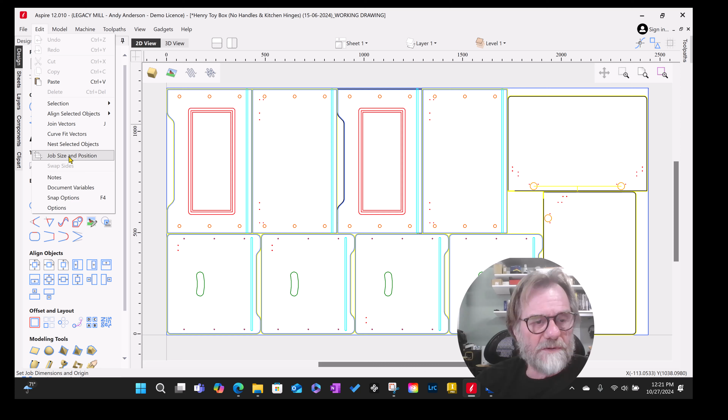So the first step in running an unknown piece of code is to go to the job setup screen. Now I'm going to cancel this for a minute, and you probably know where to find this, but I'm going to go to the edit drop down, and I'm going to come down to job size and position. And that's going to tell me how Wayne set it up for his machine. So we'll just start in the upper left-hand corner. It's a single-sided part. Double-sided and rotary parts we'll probably handle in a different project. I'm using double-sided in some door projects that I'm making right now.

Now we can see that Wayne works in metric, in millimeters, and that's the way his material comes, the thickness, that's the way basically he thinks and works. But Aspire is so brilliant that all I have to do is select inches and everything is instantly converted for me. Now my material is also slightly different. So I have a 97-inch long piece of MDF and a 49-inch wide piece of MDF and a 3/4 inch thick piece of MDF.

Now the other thing that's different is I've set up my system so that I run 0 on the machine bed. Lots of people set up on the top. It's an easy, fast way to set up. But when you run lots of sheet goods and you run the same kind of sheet goods, most of the time, setting up off the bed allows you to eliminate the touch off the material step. So that's what I do whenever I can. In this case, 0 is the bed of the machine.

And that means that if the bit came down and touched the surface, it would be at 0.75. If it was set up on the material surface, when it touched the surface, it would be at 0. If I drilled in 1/4 of an inch, on the machine bed, it would go from 0.750 to 0.5. The opposite would be true if it was a material surface. It would go from 0 to minus 0.25. Okay, that being said, the obvious thing is if I don't change this, then the program is written from the surface, but I'm running on the bed, it will try and drill clear through the material to start its cut.

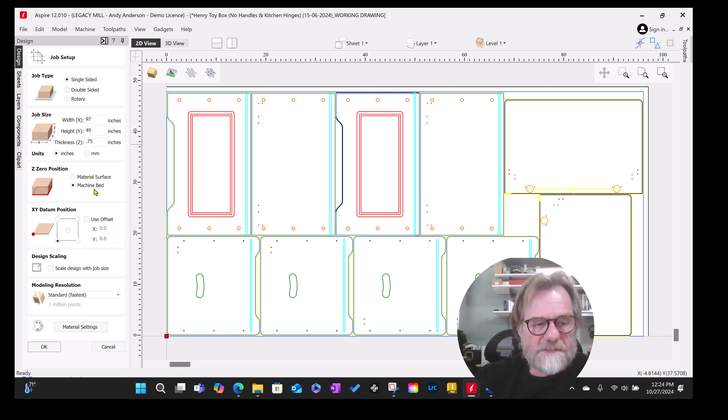So this is just probably the most important step. Lots of people do it the way I do. Lots of people go off the surface. Just double check and find out how the other fellow who's given you the program is running, and make sure you set up your machine that way when you run this part. You can change if you want, but this is my surface. I don't want to have to touch off, so I'm going to go here.

The datum point is in the bottom left-hand corner here. If we get on the screen here, the operator would be standing here. The tool changer is down on this end. So this would be on the right-hand side closest to the operator. That would be my 0 point. So I've set up the first most important step, which is make sure my job is set up correctly.

The next thing we'll go on to is, do we have the tools set up the same as Wayne? Do we have the toolpaths with the same speeds and the same run times and same depths of cut as Wayne does? So we're going to check those one at a time as we go through this.

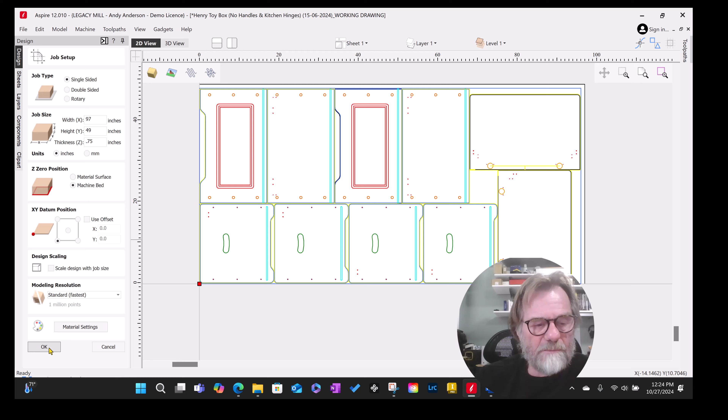So I'm going to hit OK, and that's going to let us go back. Now, if anything changed, and it has, then it wants to recalculate everything. Every time it asks recalculate, I say yes, and we've recalculated.

All right. Now, here is our program, and if you look at this, you see 2 identical parts, and you see here 2 identical parts here. These are one's turned, but they're identical parts. So this is 2 toy boxes, and there are a couple of tools that are going to be used to set this up. So I'm going to go over here and look at the tools that he's using. And we'll do a little interpretation. I may even go change these.

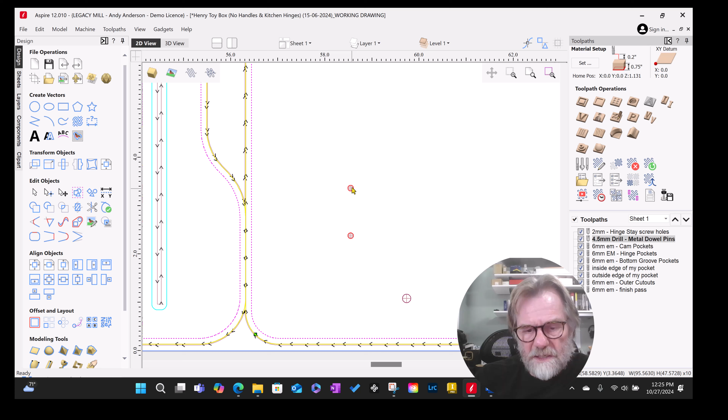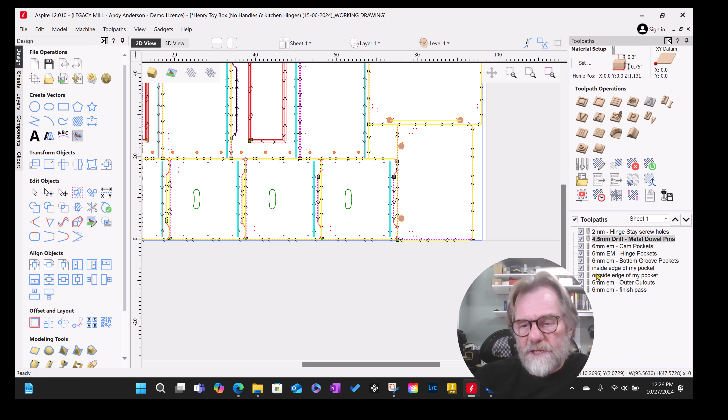So he's using a 2mm hole, a drilling process, to put in these holes here. These are for the stays, and down here on the lid, these are going to hold in my European style kitchen hinges, all right? Then I have the 4.5 millimeter. For those of us using inches, that's about 0.177. A 3/16 of an inch drill will do that job if you want to change that. And then we have 6 millimeter for the cam pockets.

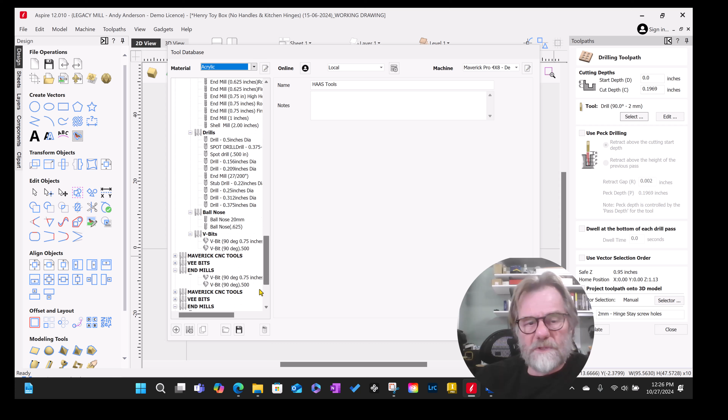We have a couple other things here. So I'm going to look at these tools, and then I'm going to pay close attention to the actual cut depths and things. So I'm going to go to 2 millimeter, and I'm going to look in my library to see if I have something that's similar. So if I go down here to my Maverick tools, 2 millimeters is about 0.085. That would also be about a 3/32. That's close enough.

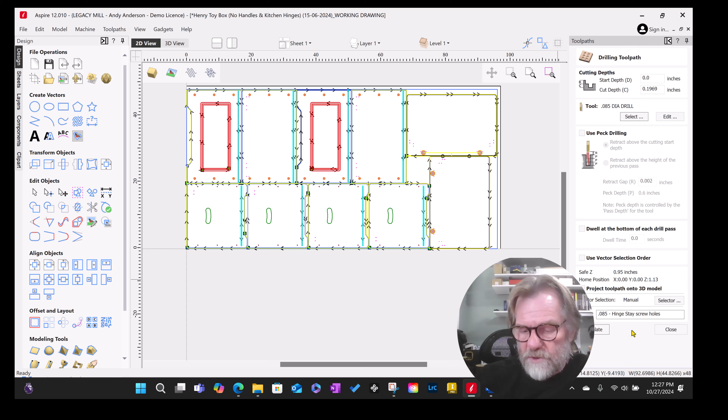So I'm going to change this, and I'm going to change my description. Now over here I have to apply that, sorry. All right, so I put the right tool in here. Nope, I haven't. I didn't apply that. I've got my recording bar in the way. So now I've got this, and I will change this to 0.085 and calculate that. Sorry about the delay there.

The 4.5 millimeter, like I said, it's about 0.177. 3/16 is close enough. So if I change this to my 3/16, then I can change this. This is the depth in inches. I'm going to come down here and just change this to 0.188 and calculate that. Then I'm going to go down and do my cam pockets.

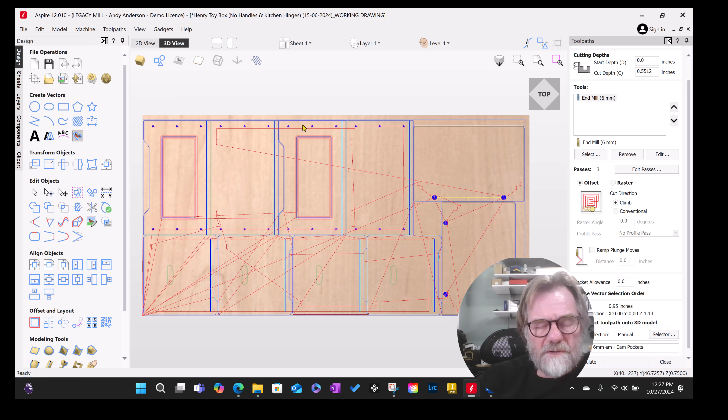Okay, so these are the small pockets up here. These toy boxes are held together with cam and posts. You see this kind of hardware in IKEA stuff. So the cam and post, we need the cam pocket for the cast cam, and then we need some drilled holes. The 4 millimeters that we just did were the drilled holes. So we can cut this with a 6 millimeter drill or 6 millimeter end mill.

Because I've been working with Wayne a lot, I carry a lot of 6 millimeter end mills. They're really inexpensive and they're good quality bits. So I buy them and use those in place of a 1/4 inch. Just for your information, 6 millimeters is about 0.236. A 1/4 inch is 0.250. So that's about 14 thousandths difference. So for this job, I'm just going to leave that tool together.

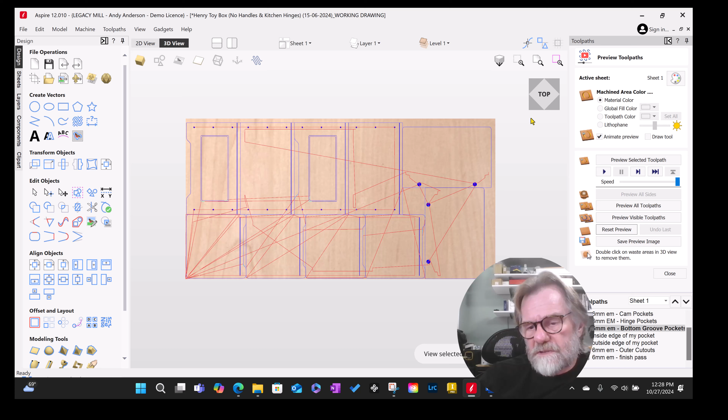All right. So these are my hinge pockets, my cam pockets, and a few other things that I have here. So let's have a look at this, and let's preview some of these tool paths. So if I preview those pockets, and then my hinge pockets, those are for the cabinet hinges. Those are the grooves that the bottom panel is going to sit into. Those are a cutout that I'm going to use for my inset panel.

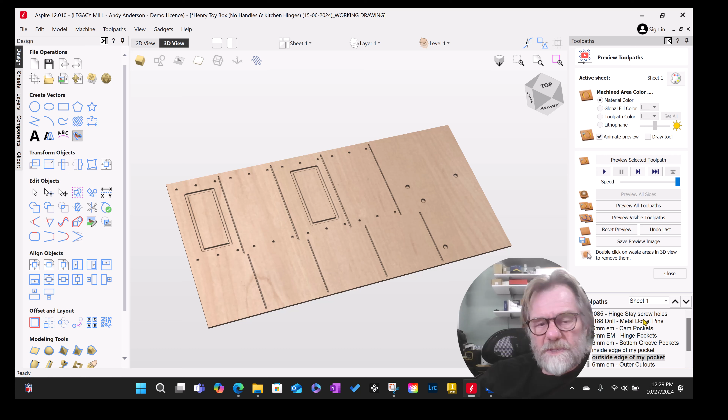We're going to make this so it can be personalized easily with a panel either flat with letters that are glued to it or stuck to it, or we could put a raised panel in there. We could do a textured panel, something to give it a little bit more sparkle and shine. This is my preview of my outside cut, and I have a problem here. It's skipping some lines here because of my offset.

I'm going to have to adjust my offset. And then this is the actual finished cut. And you'll see that here there's a little light coming through, so we've cut through the material. So what I do is I don't use tabs anymore, or I use them if I have to. But with this kind of a job, I prefer to use an onion skin.

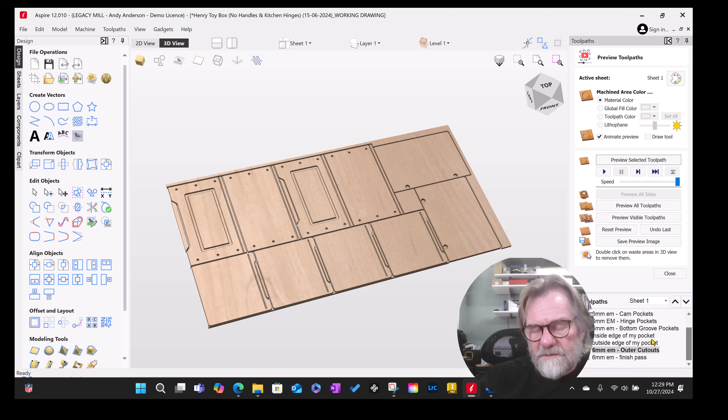So I know my material is 750. So if I go to my first outer cut, let's just look at this one for a minute. What are we going to do with this? We're going to go to almost through the material, so about 730. Leave about 20 thousandths of material waiting there. And then I'm also going to make an offset here.

Now Wayne uses every bit of the wood, every bit of the material. So I'm just going to step off just a little bit. I'm going to go off 4 thousandths of an inch, or half a hair, so that I don't go right up against the finished edge. I have a little bit of material to take off on my final pass. So I'm also going to look at a couple of things. I'm kind of jumbling this together, but stick with me, we'll be all right.

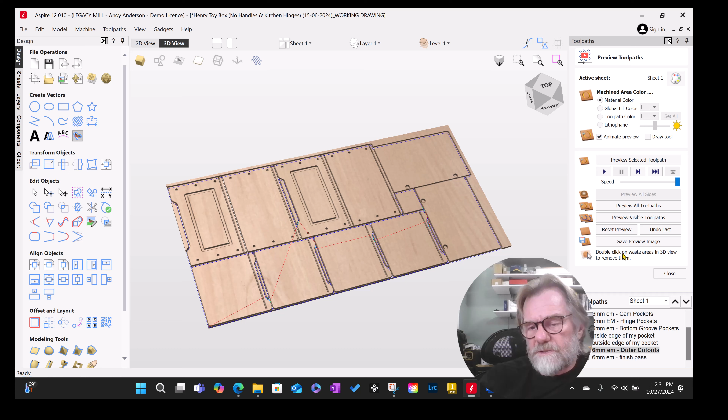So I'm going to check my RPM on these cutters. About 18,000 is fine, and 350 inches a minute with a plunge rate of 175, that's just fine. So we will go ahead and calculate that. All right, now I want to go back to my preview page, and we'll reset the preview, and we're going to look and see if that gives me full cuts all the way to the bottom. And no, it does not. So what did I do here? My offset.

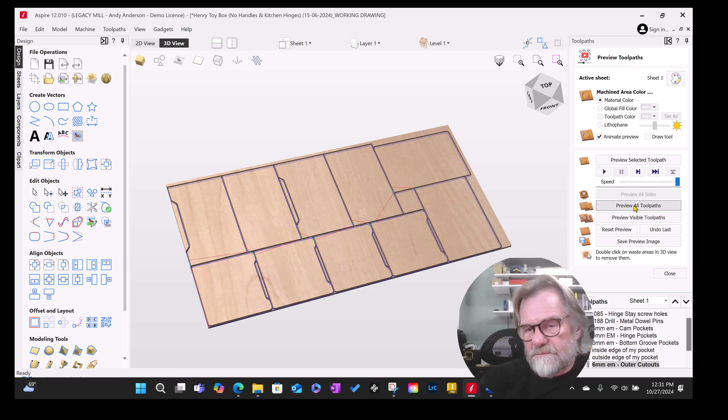Boy, he does not waste any space at all. I'm going to change this offset. Let's go with 3 thousandths and see if that's going to give me close enough. So you can see that each one of these cuts is going to overlap the cut next to it. There will be so little waste. So I'm going to reset and then just preview this one. All right, so that's good.

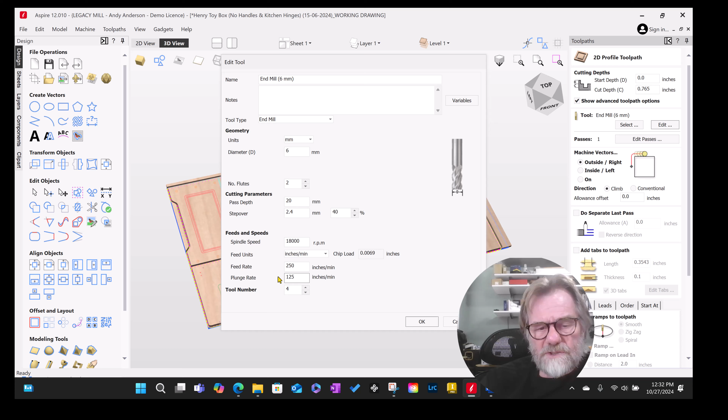And then this is my finish pass, and it will have no offset here. It will go to 765, about 15 thousandths through the material into my spoil board. Marks my spoil board up a little bit, but it gives me a good clean edge on the bottom. I'm going to edit this and look at the feed rate. So I'm going to be about 250, a little slower because I want a clean edge, and this will be 125, and we'll do this.

Now, because I'm using an onion skin, I'll have to go back and look at it. I do not want to ramp. I ramp most of my cuts, but I do not want to have a ramp on this. I want it to start in a corner. I like this corner closest to me here. So it's going to start in the corner of each one of the parts, work its way around, and cut away that little onion skin. So there will be very small cuts, but everything will stay in place, and I won't need to go sand away any tabs when I finish. So I'll calculate that.

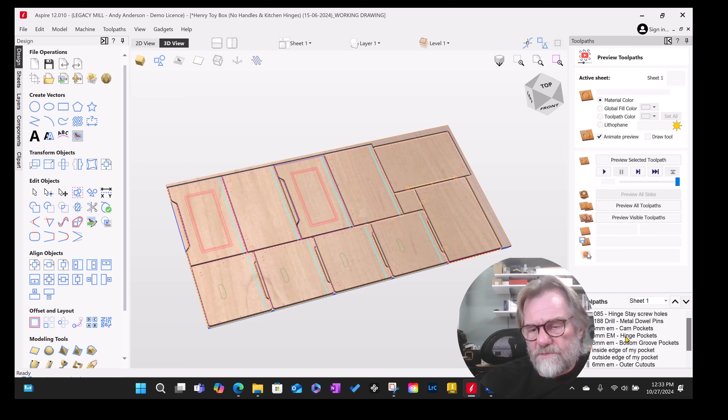Okay. Now I added this. Let's just give you the view. I added these 2 cuts here, and originally I was going to cut them with a metric bit, but I'm going to use my 1/2 inch compression bit, which is in my tool slot number 1. I'm going to calculate that. And this is the other one, and I'm going to do the same here.

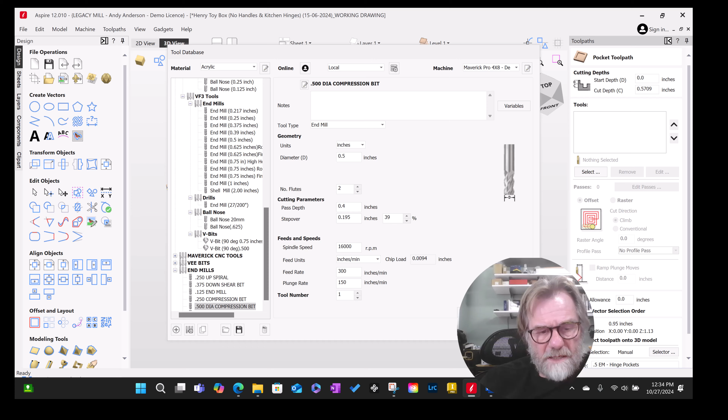And I'm going to come down and use my compression bit again. And since I'm using an additional compression bit, I'm going to also go to the hinge pockets here. And I'm going to change this to 0.5. And I'm going to remove this one and select the same bit, down here in my Maverick tools. I'll calculate this.

Okay, now if you use this, you won't mind the detour too much. If you don't use this, I hope this helps you out, but I'm going to go create a setup sheet, and for now I'm just going to call it Test Henry. Oh, got to put the right letters in there. And it really doesn't matter.

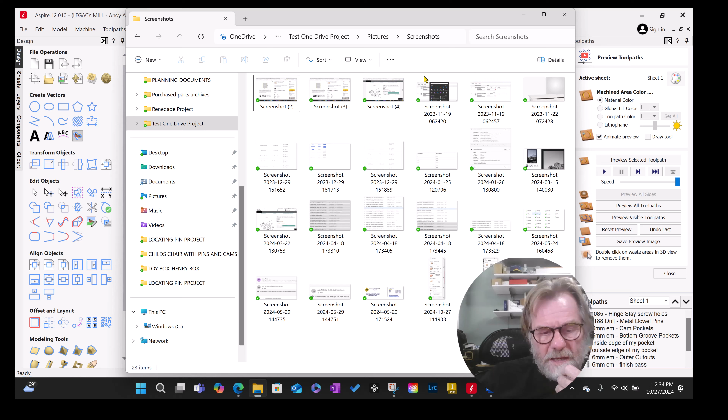When I bring up that file, here my recents should be sitting right here. There's Test Henry. Now this tells me about my material, tells me I'm on the bottom of the material. I'm in the bottom left-hand corner if I'm standing on the side of the machine, the right nearest corner if I'm standing by the controller. My home position is 0, 0. Everything about here is just fine. This is the amount of material I want to be above the part, so I'm looking good.

And I have updated. I have 2, 3, 4, 4, 1, 1, 4, 4, 1. Now, that doesn't make a lot of sense to jump back and forth, put in number 4, do a couple of cuts, then go to number 1, then come to 1 down here. So let's go back and look at these real quickly. We don't need that. We don't need this. There we go. Sorry about all the clutter. I was doing another project when I started this.

So this hinge pocket is going to be a 1/2 inch. And these two are going to be 1/2 inch. I'm going to raise those up. So I'm just going to take the hinge pocket and put it right after the drill. I'm going to take the inside edge, and it doesn't really matter what order I do, inside or outside, but I'm going to put that after the hinge pockets, and then I'm going to come down to the outside edge. And those should now be in order.

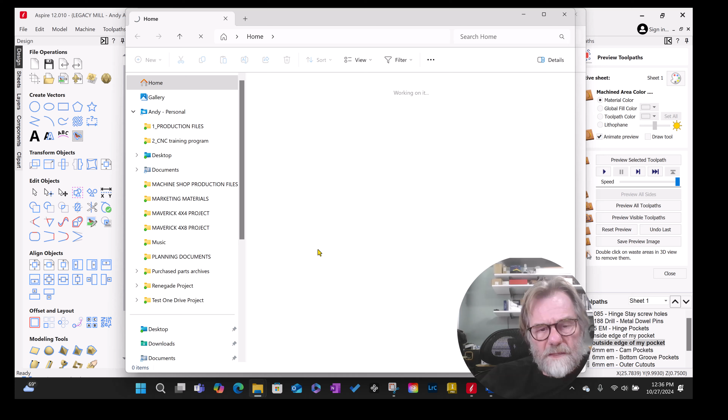So I'm going to create another setup sheet. We'll just throw it under the Henry test. And my recents should come up as Test Henry. So now my tools should make more sense. I'm going to drill the 085 drill. I like to do my drilling first, then the 188 drill. I'm going to use the 1/2 inch compression bit on 3 different operations. I'm going to finish up with all 4 or 6 millimeter bits in station 4. So that all looks really good.

Let's just take a quick second and go down to one of these that we understand. Here's hinge pockets. It's going to tell me what bit I'm going to use. Okay, it's a 1/2 inch compression bit. It's going to tell me the spindle speed. Everything I need to know about these setups that are in the program will be on the setup sheet. I like to take this out to the machine with me so I can just double check. So this is the depth of the cut here when I'm cutting the pocket. But this is the pass depth.

The pass depth that I set for the tool says I don't want to cut any deeper than this because I'm worried about it not having enough horsepower or whatever. So I'm going to do this 571 in 2 steps, obviously. Now it won't go 0.4 and then 0.171. It will go half of 571 because I've said this is less than that. But I can do the whole depth at one time, and so I'm going to change that.

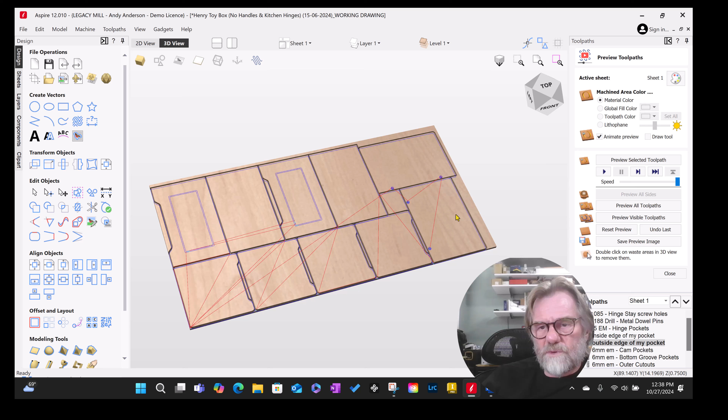I'm going to look at this pocket. Now the pass depth is bigger than that. That's good. And then this is bigger than that. That's fine. So that'll do it in a single pass. And down here in the cam pockets, those are the small pockets. This is still sitting in metric, so we'll have to work on that. So we've got the tools in the order we want. Let's go look at each individual tool and see what we've got.

This is very, very important. Drill bits are thin, and they're not balanced. So if you spun at 25,000 RPM, not only would it cause a fire or at least burn your wood, it would also be unnecessary and probably would result in the bits snapping off and flying across your room. So check your bits. Drilling 5,000 is as fast as you want to go, 5,000 to 6,000, but never go faster than that.

So I'm going to look at all this and say, well, this is all fine, we can apply that. But my drill, these are pilots for my hinges. I'm going to go 1/2 inch deep, and we can calculate that now. Peck drilling allows me to drill a little bit, then a little bit more, then a little bit deeper, and finally get to the bottom of the hole. That's controlled by the pass depth. So if you want a lot of small pecks because you're in very hard material, you can use this tool. But in particle board or MDF, that's not necessary.

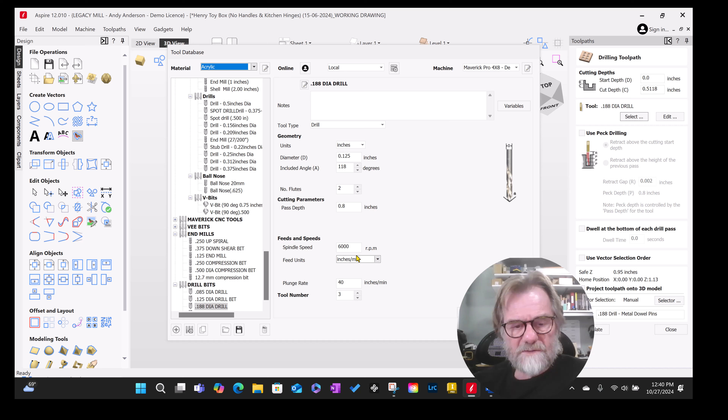Let's go up and look at this tool. So we'll go back to our 188 drill and look at its parameters. It's 6,000, that's going to be fine. 40 and tool number 3. That's all fine. My depth on that is also going to be about 0.55, which is what I like to use. It got converted from metric. So we're not going to peck drill, we are going to drill.

Okay, my hinge pockets, we're using that 1/2 inch compression bit. If we hit the edit button, we can go look at the parameters there. 16,000 RPM, 300 inches a minute, tool number 1, that's all good. The depth, the pass depth is 0.4. Over here I can see that I want to go 0.57, so I'm going to change this to 0.6. There's no need in taking 2 passes at something that shallow.

So I will calculate that. And then let's just quickly make sure that the pass depth is bigger than that depth of cut. It is, so we're good to go. We'll check the other one. Shouldn't be any different because these are set up in the tool parameters. So we're going to go 0.39 deep. If we edit this, then 0.4, so we're good.

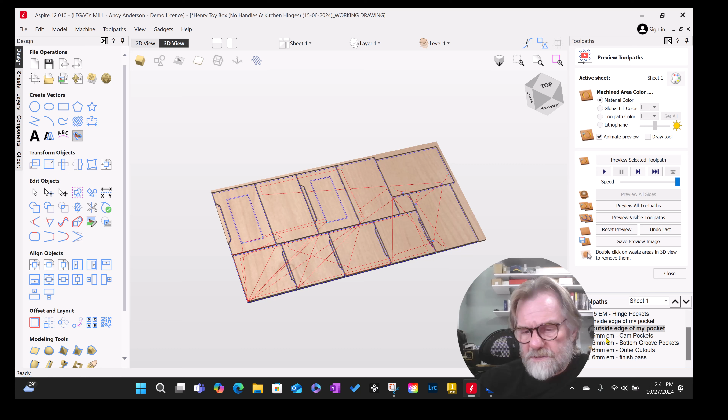And that leaves us with our 6 millimeter. So let's have a look at these tools. The 6 millimeter tool, I don't actually have this in my library, but it comes up and it has its own parameters. If I use edit and not select, I can see what Wayne has everything set up. He's at 18,000. The feed rate's about 150, half of that is his plunge rate, and there's nothing wrong with that. The diameter is 6 millimeters.

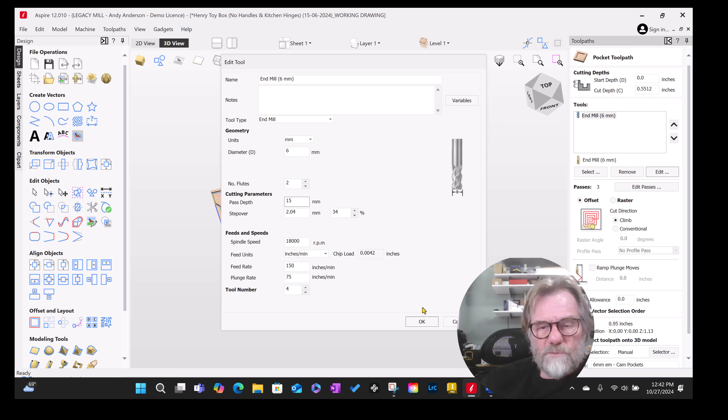So it's 6 millimeters. I'm going to change this to inches. No, I'm not, I'm going to have to do a little quick calculating. Now I'm going to go to inches. What the hey? No, I got to stay with millimeters. So my pass depth, I want to go 1/2 inch. I do the math in my head, that's about 12 millimeters. So if I put this at 15 millimeters, it will cut that pocket in a single pass. So that's all right.

Okay, I don't need to ramp these moves, so I'll pass that. Well, actually, I'm going to ramp these. It's going into those little pockets.

Okay, now these are the panels, or the grooves that the base panel is going to fit into. So let's have a look, it's 4/10 deep. This isn't going to be deep enough. This has to be back to about 15, so it does it in a single pass. 18,000 is fine, 300, 150, that's all right.

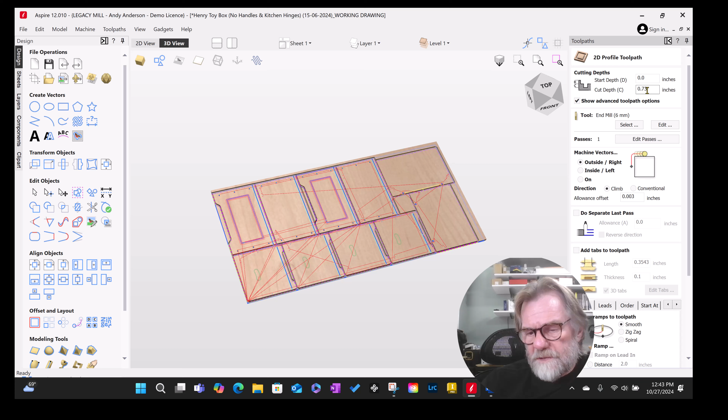So that is that one. Now the other outer cut, we want to go almost through the material. Let's look at what our cut conditions look like.

It has to go .73 deep, the pass depth, 24.5 or 25.4, I forget. But roughly 25 millimeters is about 1 inch. So if I want to go to 750, let's just be careful and say we're going to go 25 millimeters per pass. That will get to that depth in a single pass. I'm happy with that. We'll calculate that.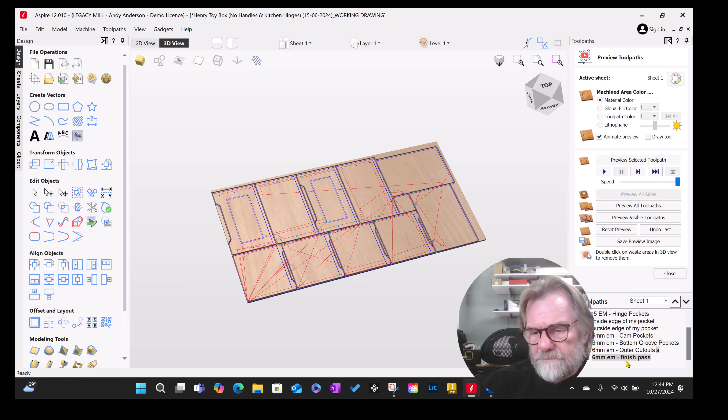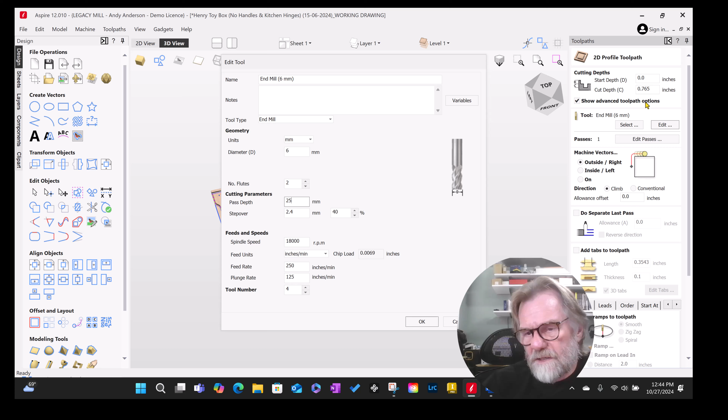All right, let's look at this one. We're going to probably have to do the same thing. So we're going to go up here. That's 20 millimeters, we're going to call it 25 so we don't have a problem. I'm slowing that down a little bit as I do the finish pass. I don't have any offset, and I'm going clear through the material, so everything looks great there. So now when I calculate this, I should have everything I want.

Now I won't print this out, but I am going to create a final worksheet there. Can't speak and type at the same time, sorry. Brain doesn't multifunction. So that's my final setup sheet.

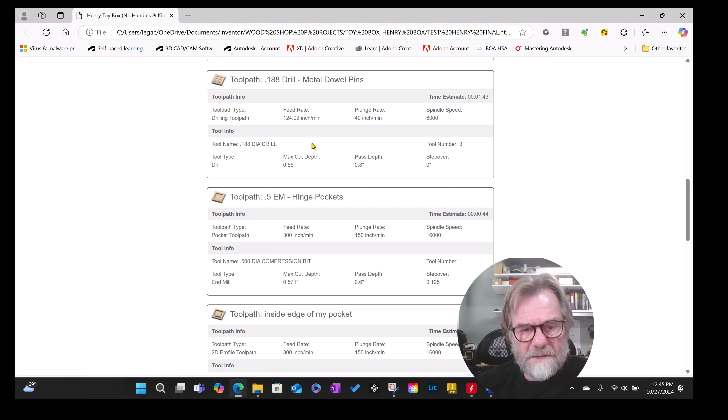So this gives me an opportunity, if I have a short memory, to check it here and check the box. But if I were headed home today and was going to come and run this part in the morning, printing this out so I have it to look at just to refresh my memory is a good practice.

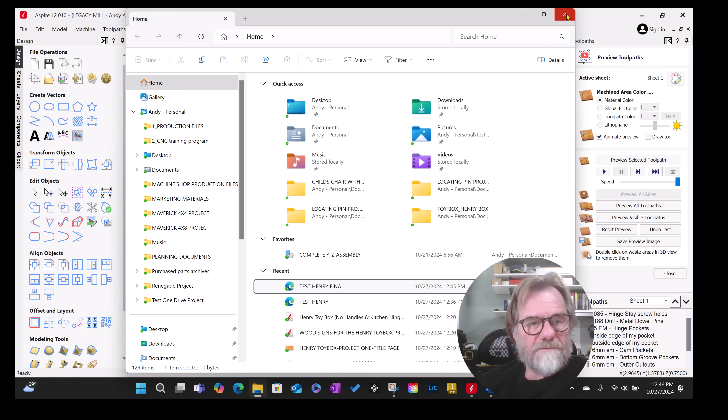All right, we spent 25 minutes so far showing you how to get this ready to go. All I'm going to do here is close this out and use the icon over here to save the toolpath. I'm going to save this toolpath into the same directory. So I'm just going to say this.

Not toolbox, toybox. So that's Henry Toybox.

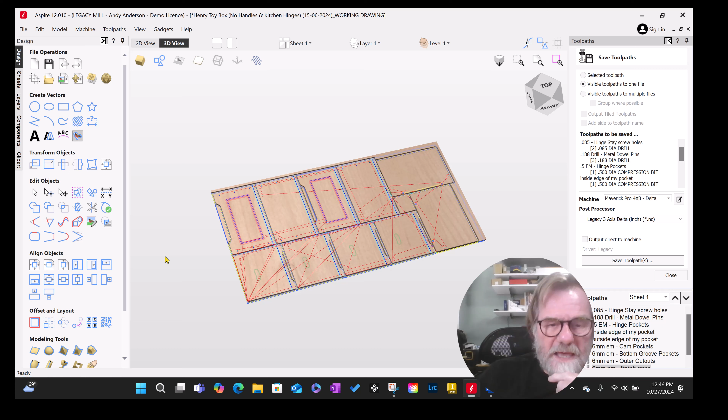So I can take that out to my computer on a thumb drive, plug it into the CNC, and I'm good to go. It's taken a few minutes to go through all this, but these are all things whenever you get into an unfamiliar program, you don't know who wrote it or what they had in mind, then you want to go through this checklist.

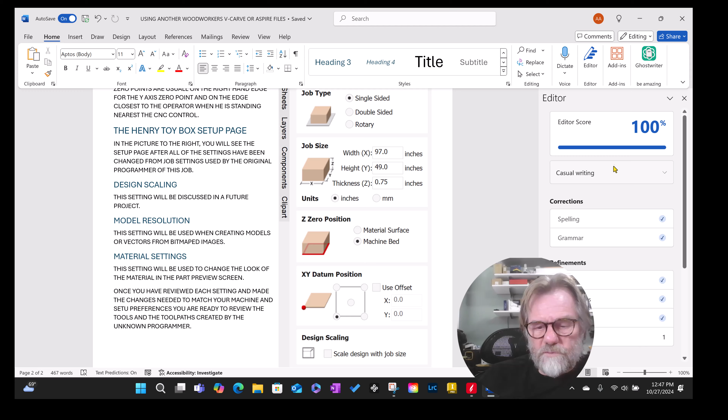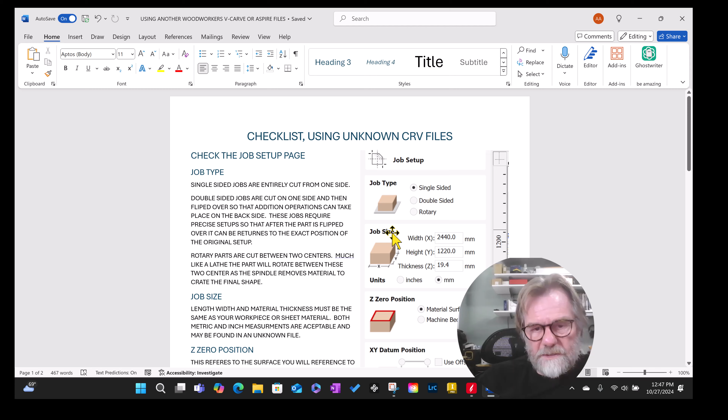Now, just for fun, I can turn this off here so you can see this. I've created a document that I can use, and you can get a PDF of this document, but this is what I use. I grabbed the graphic, did a snippet and grabbed the graphic. This is the way I found it.

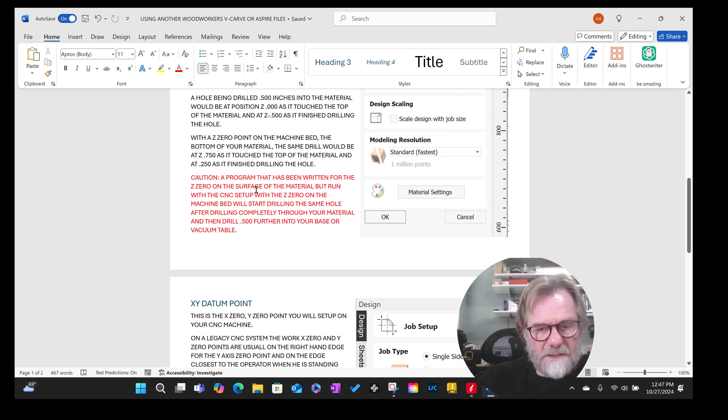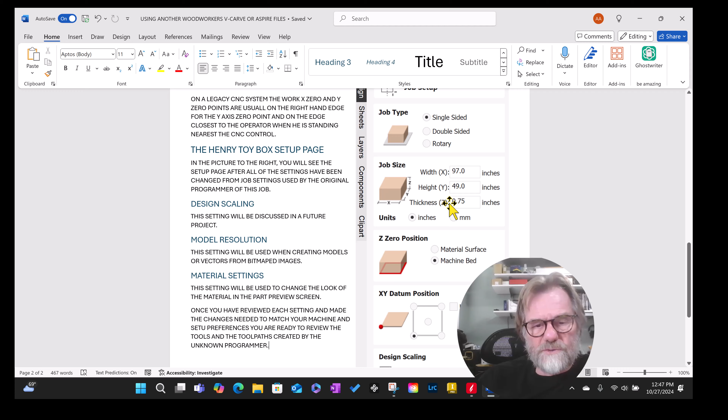Each one of these data points, or each one of these parameters is defined. And there's some cautions in here, things that you need to watch out for. And then this is the last of the definitions, and then here's the actual setup page after I changed everything. So these are the setups. So now my setup and my job is set up the right way.

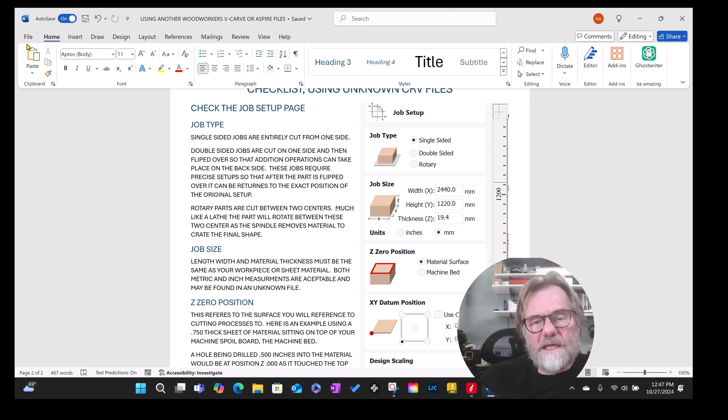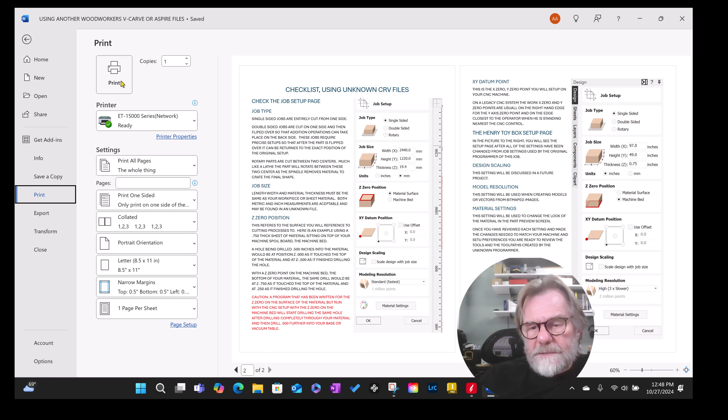All right, this is printing. I'll ignore this now, save it, and put it away for now. And that pretty much wrapped things up for me.

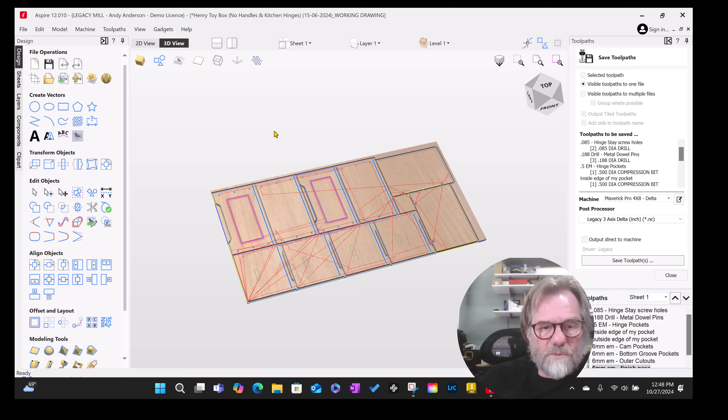The next thing you'll see is I'll be in the shop. We'll be cutting parts, and then the last phase will be we're going to be assembling the toy boxes, and I'm going to explain how to use the cam and post, the hardware, the drill fixture we need to be able to do that. So that'll be kind of fun to see that, I think, anyway. But this is a great project.